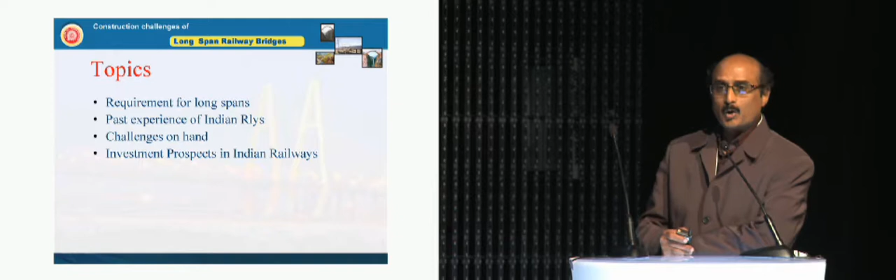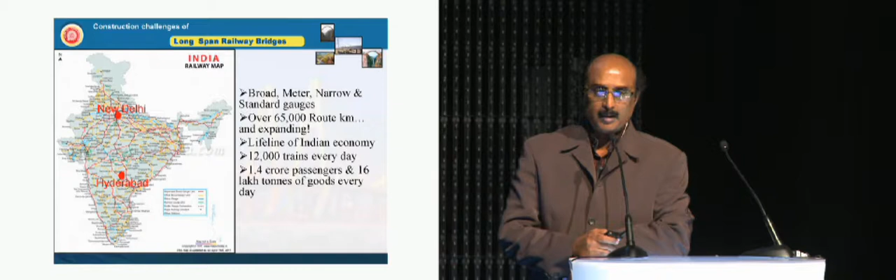When we talk about bridges, it is the long span bridges which are very critical. To give an introduction about Indian Railways, there are different gauges in India - broad gauge being the largest, we have meter gauge, narrow gauge, and even standard gauge on the metros. The statistics are very staggering - we have over 65,000 route kilometers, which comes to more than 1 lakh, almost 100,000 track kilometers, and it's expanding. Every year a lot of new projects are coming up, new railway tracks are being added. New Delhi is the capital of India, and Hyderabad, which I've highlighted, is the place from where I have come.

When we speak of long span bridges, we should also know why they are required, because they are generally considered to be very costly, so we should not just go for a long span bridge. These are the requirements for which a long span bridge is needed: navigational, when you have to pass huge vessels, huge ships across the ocean, and a bridge is to be constructed across the navigational channel. Sometimes you have to connect two valleys, then you need a long span. In case of metros, when it has to cross a major road junction, you need a flyover of a very long span.

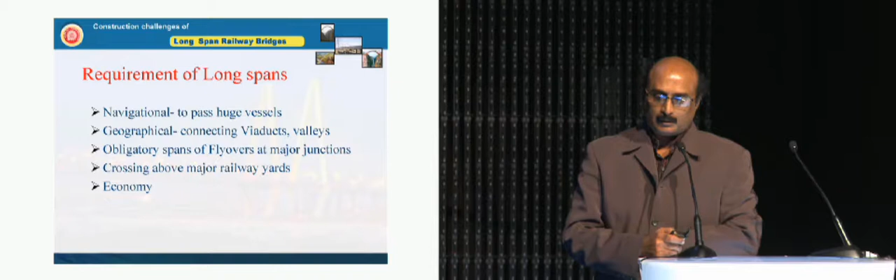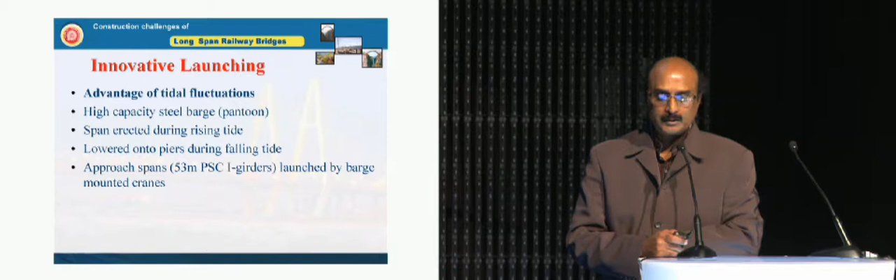Some of the important bridges we have constructed include the Zuari Bridge in Goa, which is a very interesting bridge. The location is Goa, towards the western coast of India. The specialty here is the launching of the main girder - the main steel span is almost as high as 600 tons. So launching of the main span was a real challenge, and a very innovative method making use of the tidal fluctuations, the low tide to high tide fluctuation, has been used to erect the span. This is the bridge after construction.

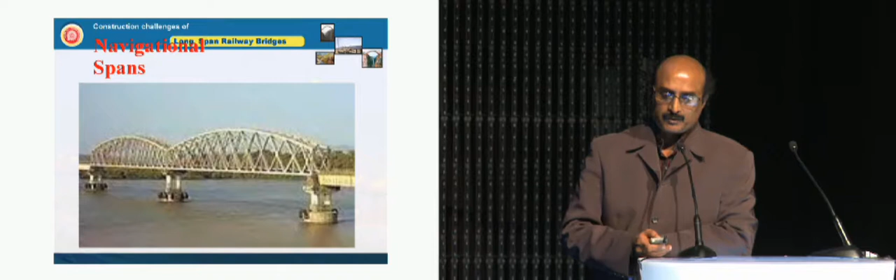What has been done is, on the river bank, a specially made platform is prepared with temporary supports. On those temporary supports, the entire bridge girder, almost 125 meters long, has been erected. Simultaneously, a high capacity pontoon, a floating device, has been placed on the river, and the bridge truss has been slided into position on the river. Once it is on the pontoon, the bridge girder has been raised to ensure it clears the piers, and as I said, the tidal fluctuation variation has been taken advantage of.

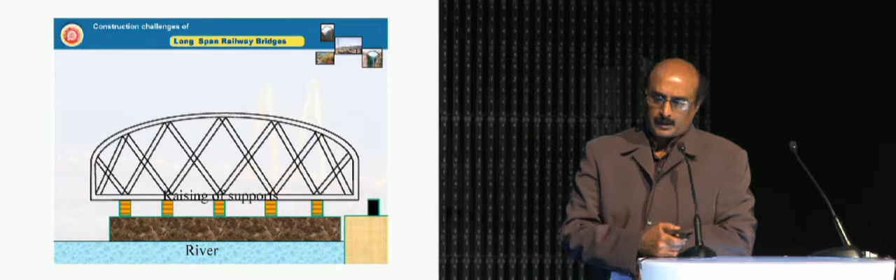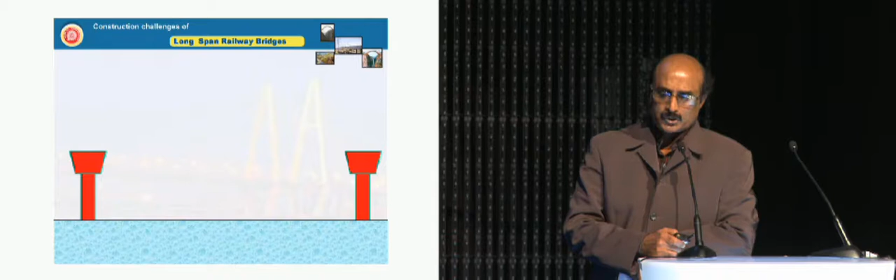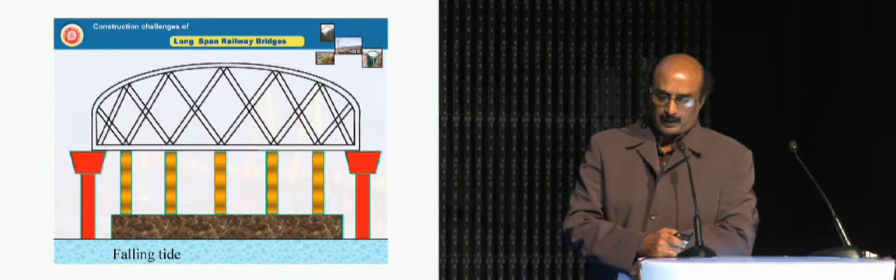So the tide is rising, and when the tide has fully raised, it is now towed into position - the red color structures behind are the supports. The bridge is brought into position, and the entire operation is during high tide. Once it has come into position, it will wait for the falling tide, and the bridge is automatically launched. Further falling will reduce the supports. So the bridge is launched with very little effort, making full use of the natural tidal force.

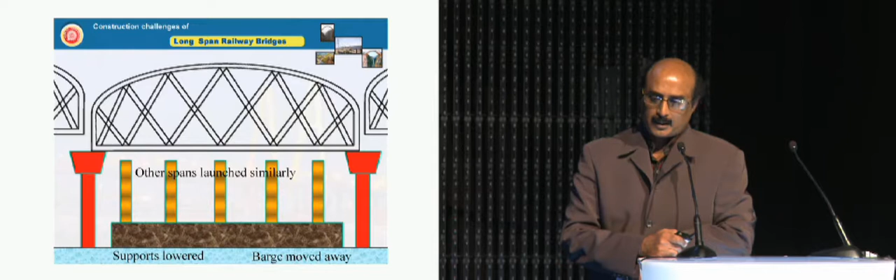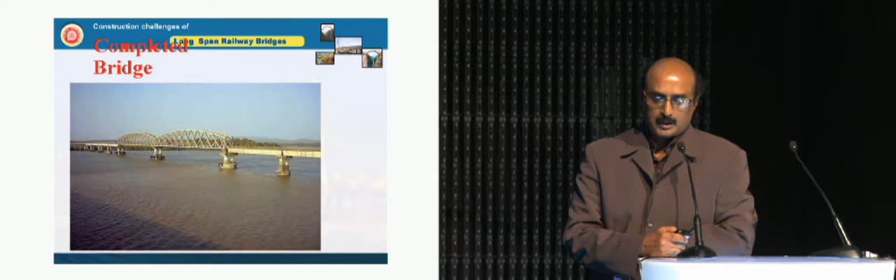Similarly, the approach spans are also launched - this is the other side, which has smaller bridges, smaller spans. They are launched by means of cranes, which are mounted again on barges. This is the completed bridge.

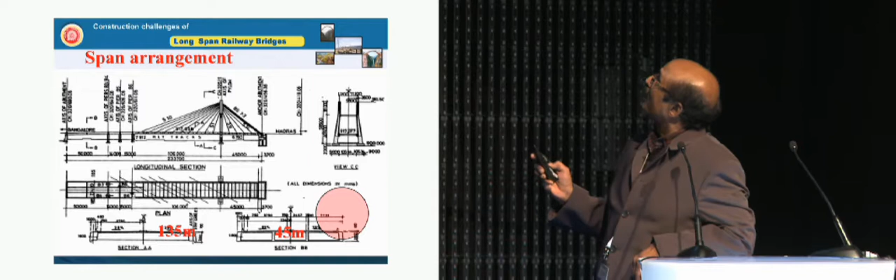So there is a huge imbalance in the two spans, as a result of which this abutment will have high uplift forces - that support will have high uplift forces. So it has to be properly designed to ensure that it will not get lifted up.

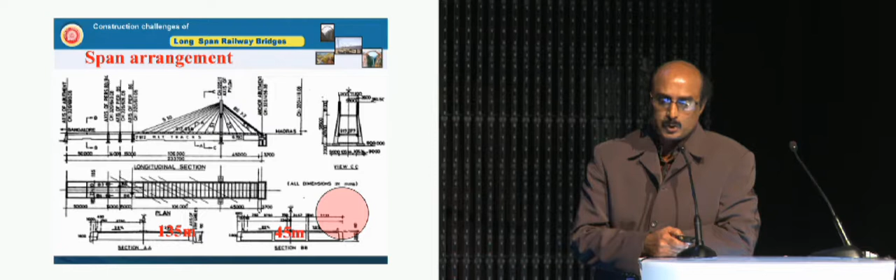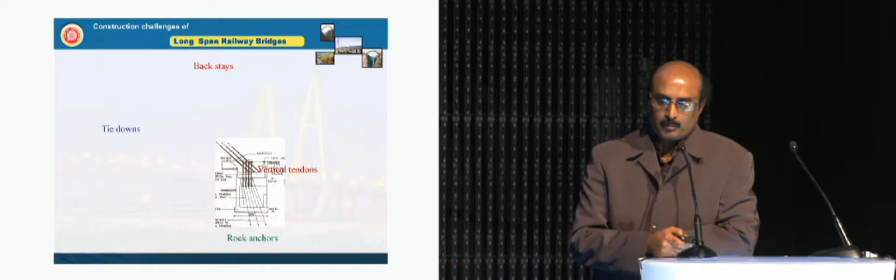The innovative design adopted here provides pre-stressed cables at different levels: backstays which connect the superstructure to the substructure, tie downs, vertical tendons, and rock anchors. This entire system ensures that the whole bridge is integrated into the rock below and has adequate stability.

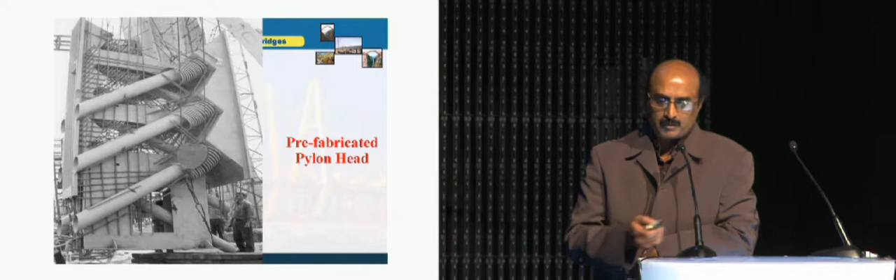During the same time, self-climbing jump formwork was developed to ensure the work progressed smoothly, and the pylon head which connects all the pre-stressed cables was prefabricated, imported from Japan, and launched into position.

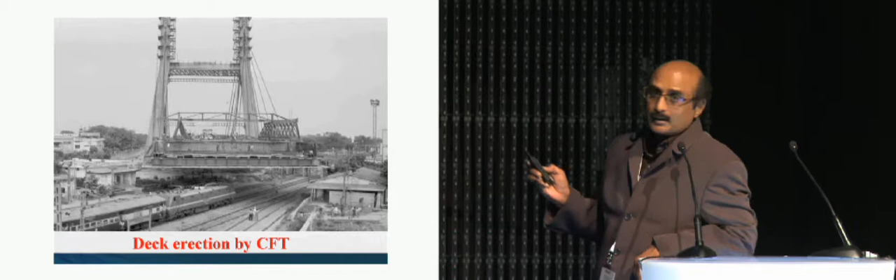During execution of the deck, since it had to be built across railway tracks, a lot of safety had to be taken, not only for construction personnel but also for the trains and traffic below. Three-level safety was taken care of: a steel platform, a safety netting below it, and since it's an electrified section, a polythene insulated sheet was also provided. The work was successfully completed.

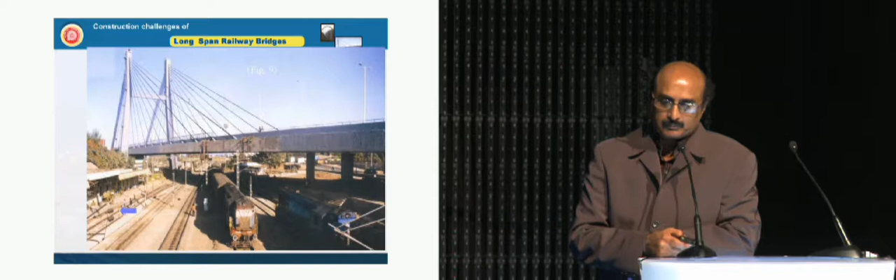Another interesting bridge is near Rajahmundry, on the eastern coast of India in Andhra Pradesh. It has 28 spans of 300 feet, which is 91 meters, and the bridge had to be constructed under perennial flow of water—the river always has water, even during summer. So a unique type of construction had to be developed because no supports could be taken from the bottom.

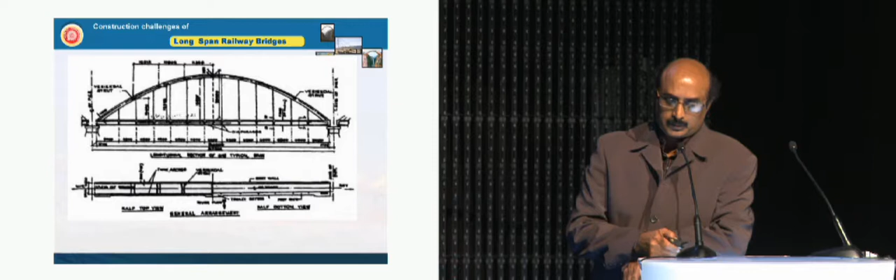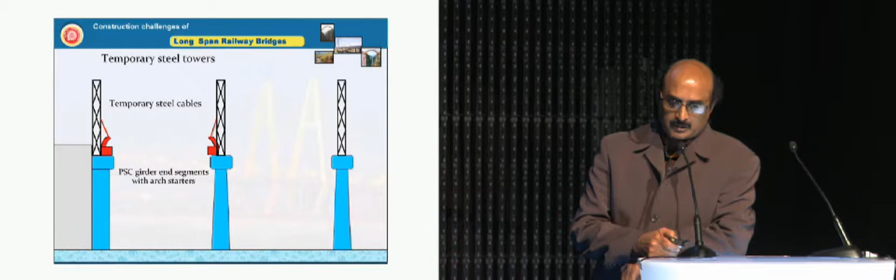Once the substructure—abutments and piers—was completed, temporary steel towers were erected on each support, and from these towers, temporary steel cables were erected. With the help of these cables and towers, the first starting segments were cast, further cables were erected, and cantilever construction of the arch was taken up in stages.

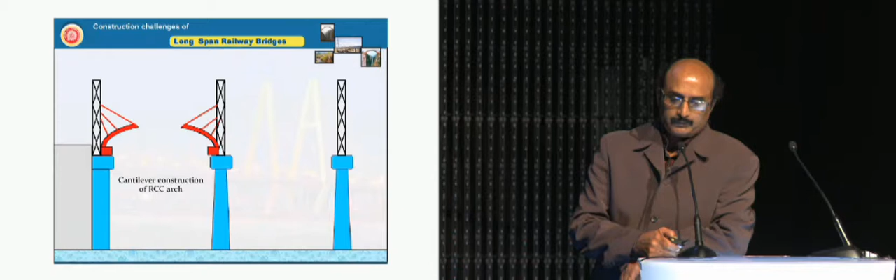First, the arch is completed in all respects. Once the arch is ready, the next step is insertion of hangers.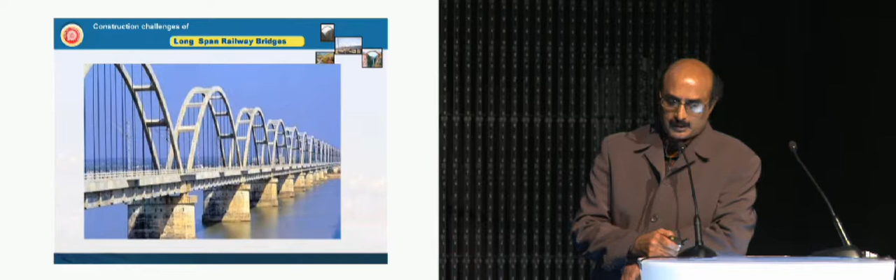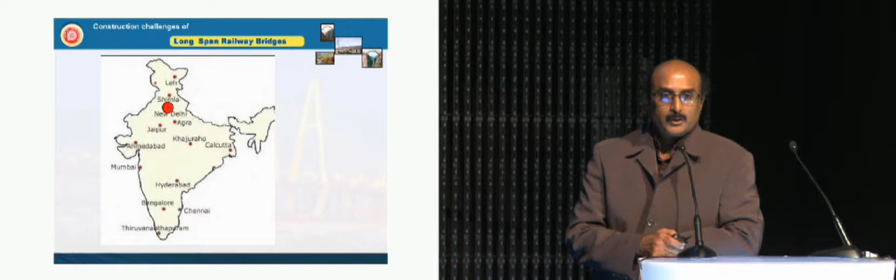A lot of local innovation was made during construction. This next example is for the Delhi Metro, a bridge across railway tracks near New Delhi, the capital of India. This is how the bridge looks—the main span crosses the Indian railway tracks, almost 4 to 5 electrified tracks in a very busy section where trains are always running, and the bridge had to be constructed without disrupting train services.

This is an extradosed bridge. What is an extradosed bridge? By definition, it's a hybrid bridge—an innovative bridge between a cable stay bridge and a girder bridge.

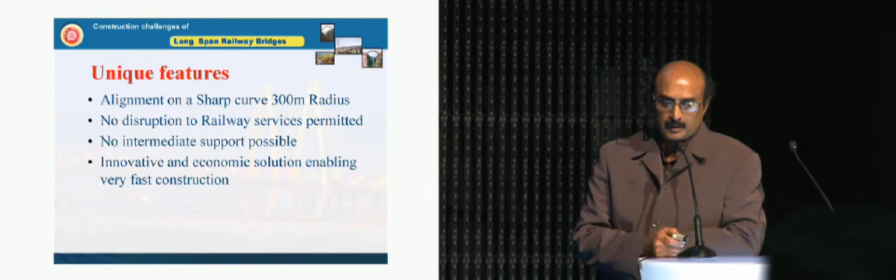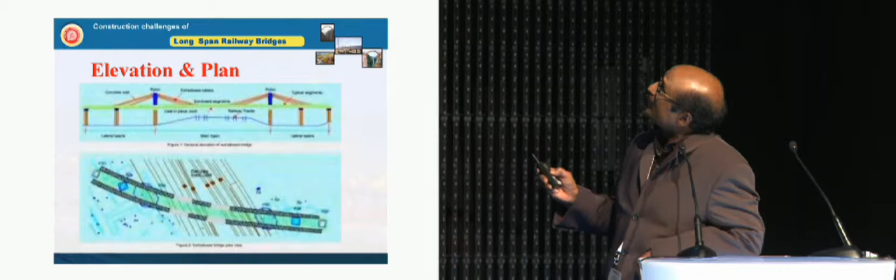It's also on a sharp curve, and there should be no disruption of rail services. No intermediate support is possible within that span of 90 meters—we cannot have any support. This is the elevation showing how it looks, over the Indian railway tracks where the bridge had to be constructed.

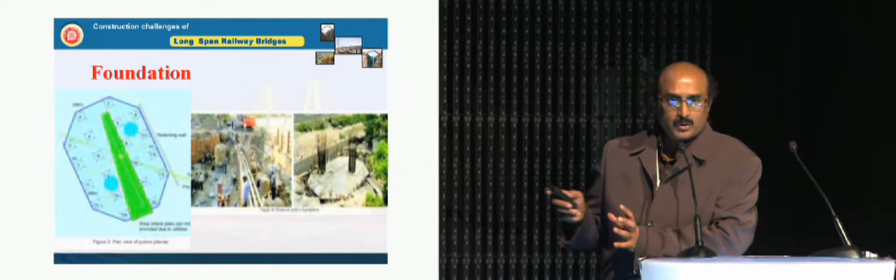For the foundation, pile foundations were proposed. But while executing the pile foundation, we had a problem of hidden utilities—a lot of pipelines were crossing. So instead of dismantling the pipes, an opening was provided through which the utilities continue to be there, and the pile cap was cast in such a way that the bridge progressed without shifting the utilities.

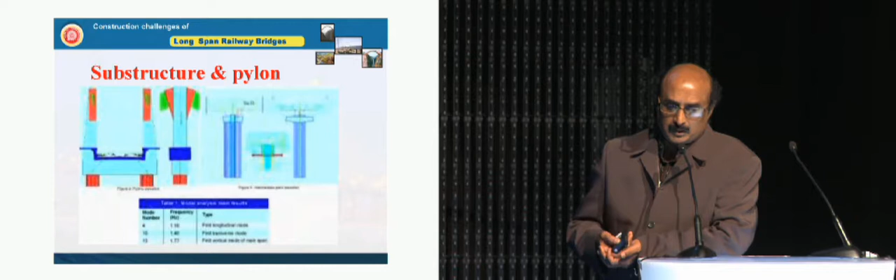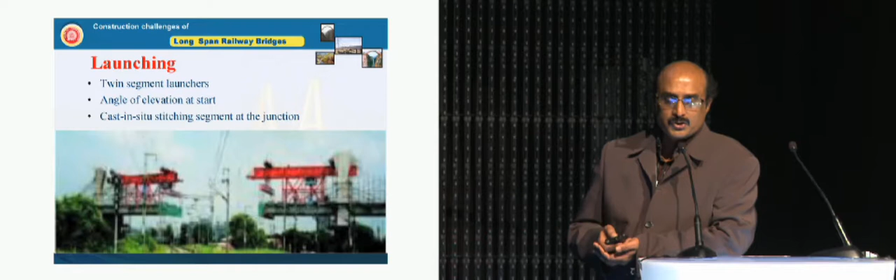The substructure and pylon consisted of RCC columns constructed by slip form work, and the superstructure is a U-shaped pre-stressed concrete segmental deck carrying 2 metro tracks. The launching was done by a twin segment launcher, similar to cantilever construction, but here the launcher feeds segments from either side and progresses from both ends.

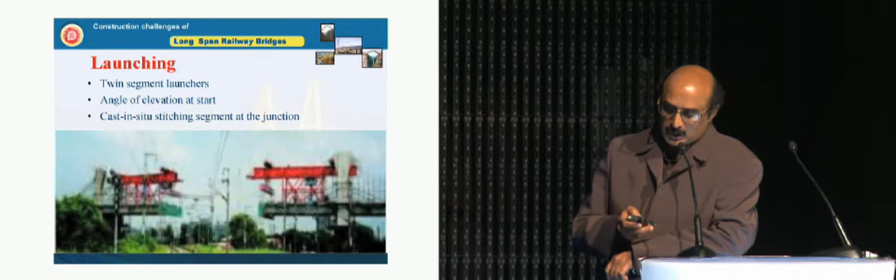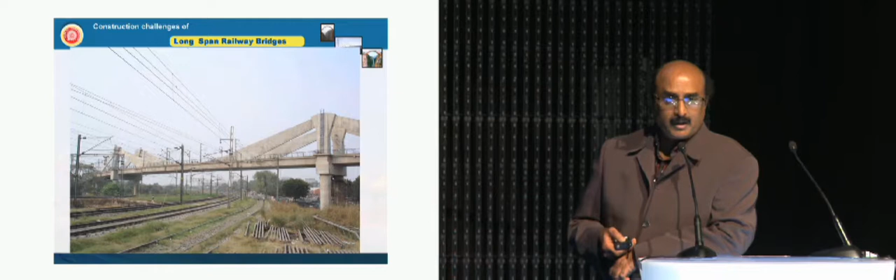A lot of safety precautions were taken to ensure the trains were not affected. This shows the final stages, when both arms meet at the center. A closure pour is made and the bridge is made ready for commissioning. This is the bridge at the time of commissioning.

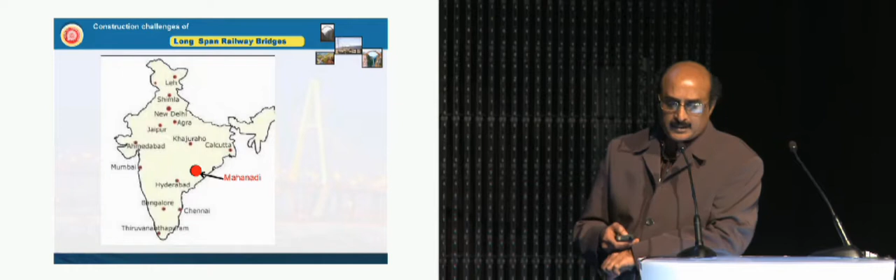Another interesting case is a steel bridge. So far we have seen concrete bridges. This is the Mahanadi Bridge, a steel bridge, again on the eastern coast of India in Orissa state. It also has spans of 300 feet, about 91 meters, with perennial flow of water.

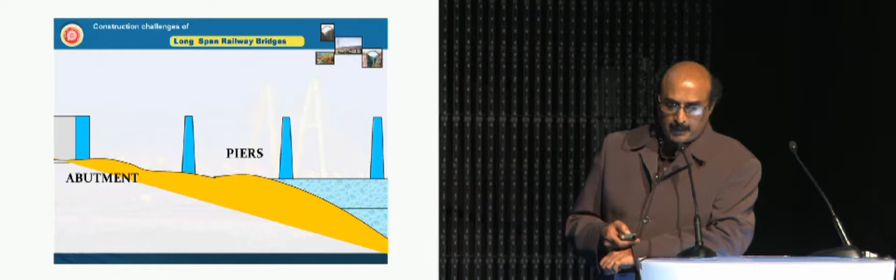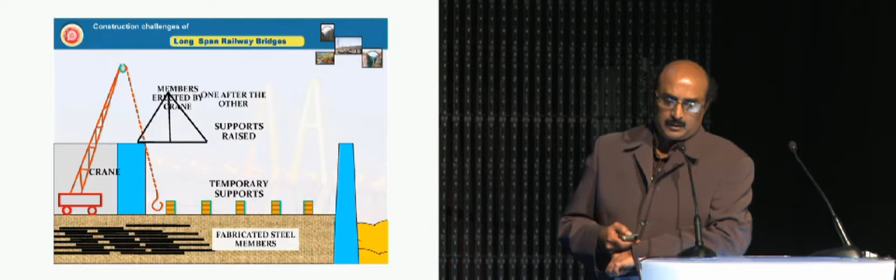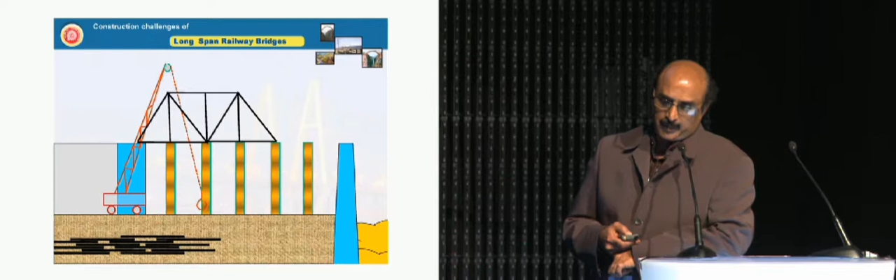Since it's a steel bridge, the system adopted is slightly different. The first span, generally a land span, is erected on compacted ground since access is available there for cranes and material. The supports are raised to the required level and prefabricated members are erected one after another by crane, since road access is available for the first span. The first span is thus erected and completed.

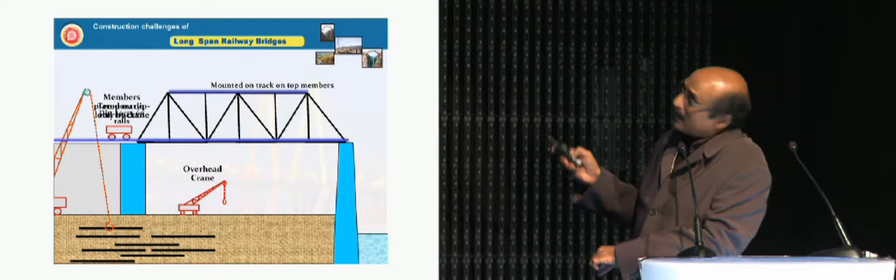Now the real challenge is constructing the subsequent spans, since they are underwater and a road crane cannot be taken over the water. So tracks have been erected on the top and bottom—you can see a track here and a track there—and a small crane is erected on top that can lift the members, along with a dip lorry which carries the member from one end to the other.

This is the dotted line showing the location of the second span. A temporary connection is made between the first and second span so that the counterbalance is available, and the track is extended and the members are fed from the end on the trolley.

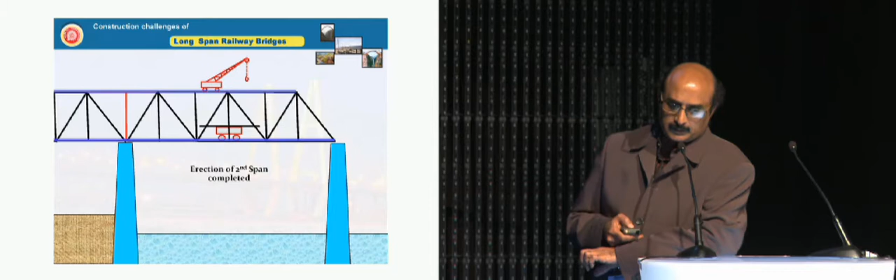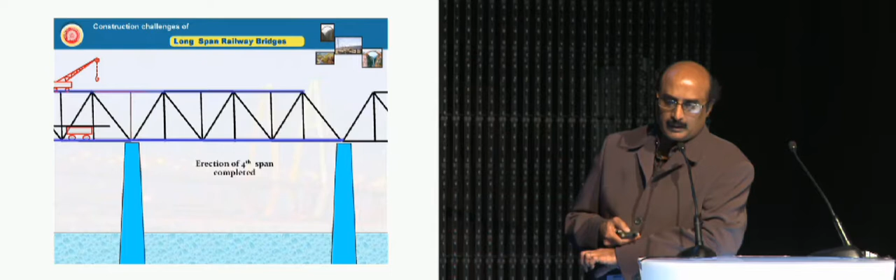The overhead crane launches the members one after the other, and the second span is completed. Now the process simply repeats itself. The temporary girder is no longer required between the first two spans, so it is shifted to between the second and third spans. In the same manner, the third span is completed, the fourth is also completed, and all the spans can be completed this way.

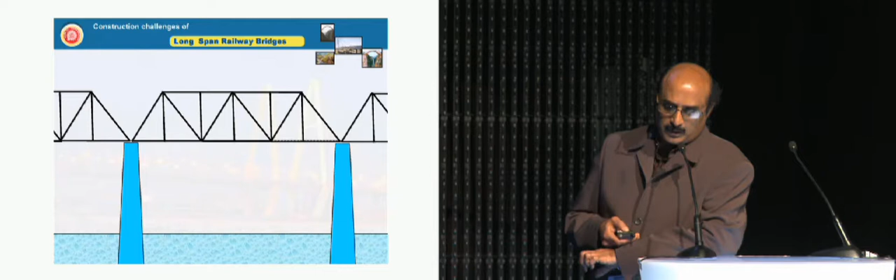This is the completed bridge. Now what is required is laying of the track on the bridge, and the train can take off.

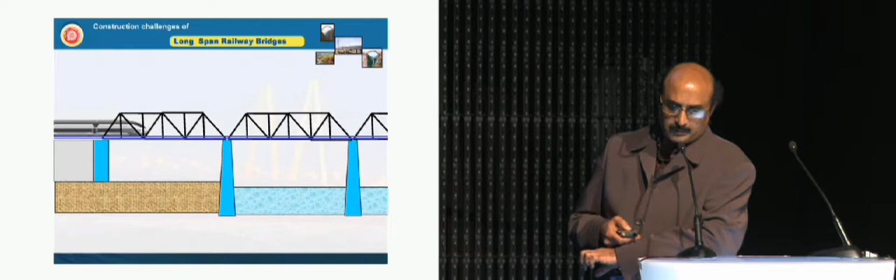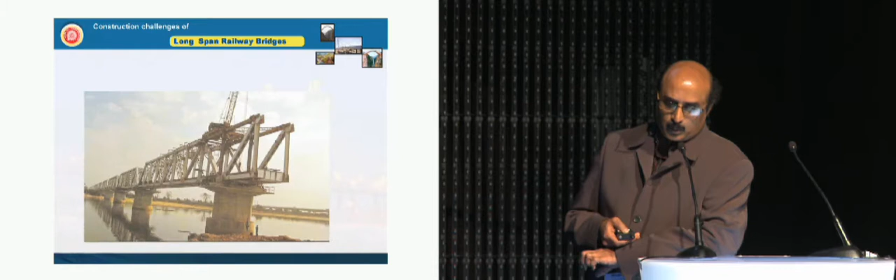These are the pictures during the construction stage. You can see how the members are taken to the site, and this is the overhead crane used for launching the members. Different stages show temporary connections being made, and temporary strengthening of the members is also required. This is a completed bridge.

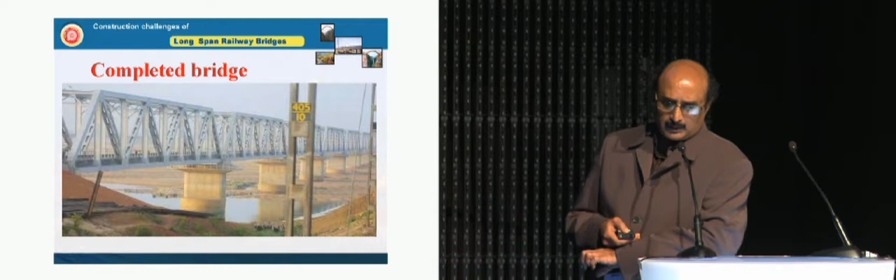This is one interesting bridge which is going to take place in the coming few years, called the Chenab Bridge. It has a very long span of 485 meters, with a unique distinction of being the longest span of that configuration. You can see it's at a height of 359 meters.

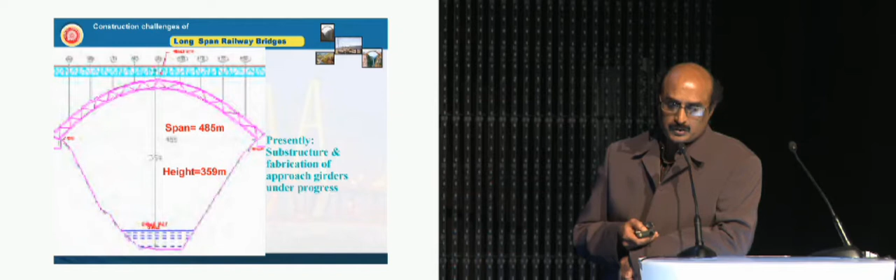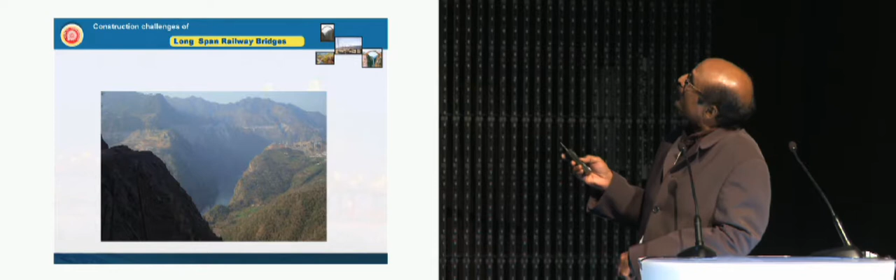The approach construction is already under progress. This is the location of the bridge. This is the approach, this is where the bridge is going to come up. The schematic view shows it is still not completed.

It has got a lot of unique features. It is coming up in a place called Jammu and Kashmir, in the northernmost part of India. The specific nature of that site is that it is highly seismic prone, in the highest earthquake sensitive zone. At the same time, the wind speeds are also very high, on the order of 250 kilometers per hour, and it is on a very sloping bed.

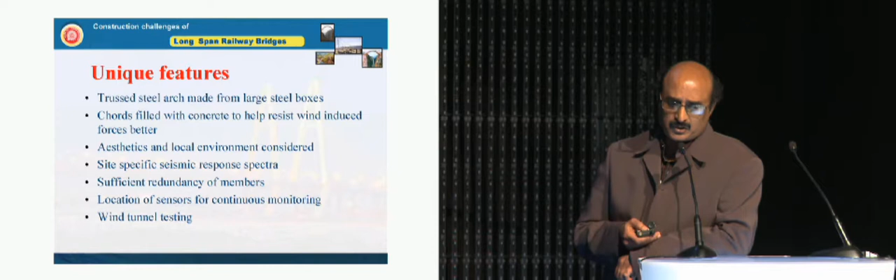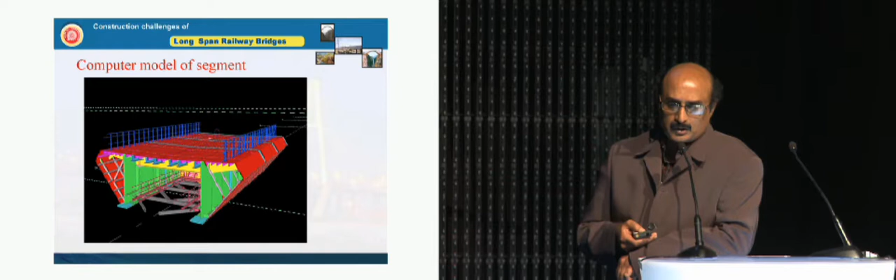So a lot of design challenges have been faced, and finally the bridge design is completed and it is coming up. Even the wind tunnel testing has been done in order to ensure that it is safe, and a model has been generated in the computer. It's a very complex type of model.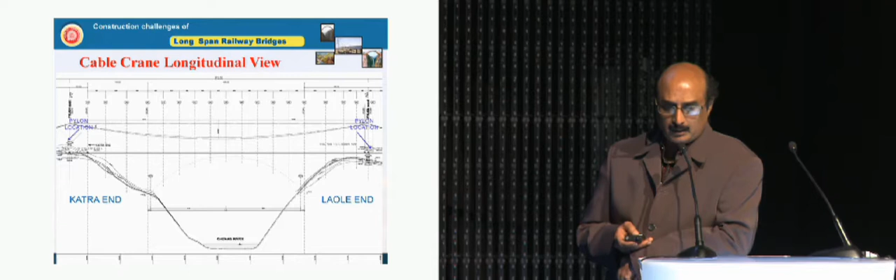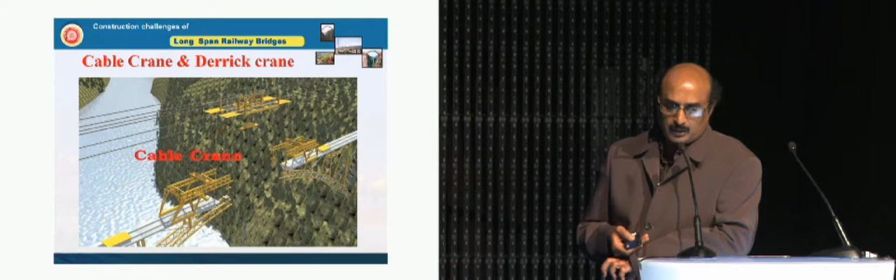Even for the erection of the arch, a very interesting scheme of a launching arrangement has been devised. You can see it's a cable crane as well as derrick cranes, both used for launching it. We can see in sequential steps how the arch is erected by means of the cable cranes and the derricks.

This bridge is yet to be done, and this is the final schematic view of the bridge. That's about the bridge projects.

Now let me come to the topic of the day, which I'm supposed to speak on: the challenges and investment opportunities in India. Indian Railways, from which I come, has developed a vision called Vision 2020. Under that vision, we have huge targets of construction of new lines, doubling or quadrupling existing lines, construction of bullet trains or high-speed trains, all at an investment of 280 billion USD, and it's already taken off.

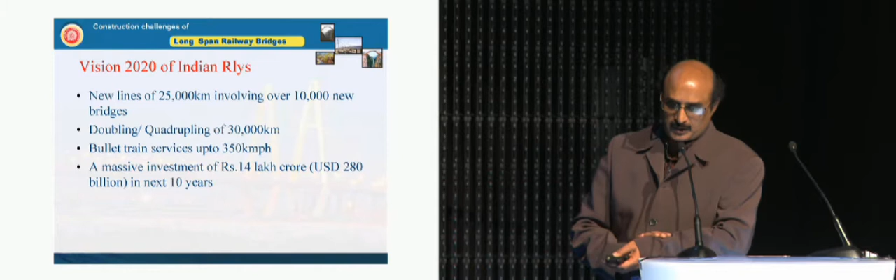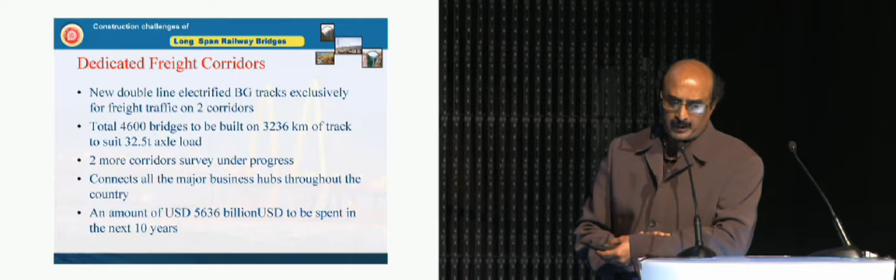Similarly, something called dedicated freight corridors are being constructed, where new double-line electrified broad gauge tracks exclusively for carrying freight traffic are being built. That is a magnitude of work totaling 4,600 bridges and 3,236 kilometers of track. The axle load also is considerably high, 32.5 tons, and the order of investment is massive.

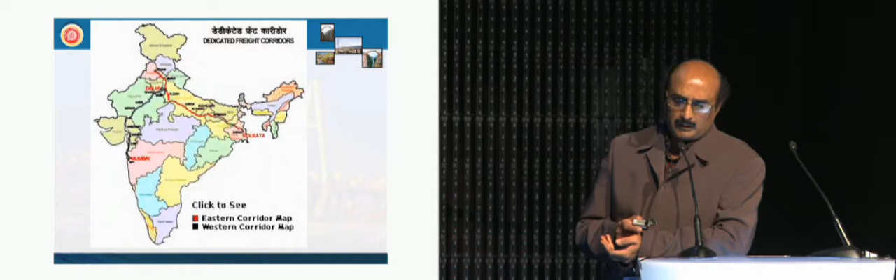These are the dedicated freight corridors which I have been mentioning. We have one on the eastern side and one on the western side. Similarly, there are two more corridors coming in the south in subsequent years.

Metro rails. Metro rail is coming up in a very big way in India. Already in 8 major cities, metro work is progressing, and 8 more cities have already shown interest, with a lot of planning made, almost about to take off. A separate authority is also being developed so that these projects are taken on the fast line, with a total estimated investment of 50,000 billion US dollars - a staggering amount to be spent in the next 12 to 15 years.

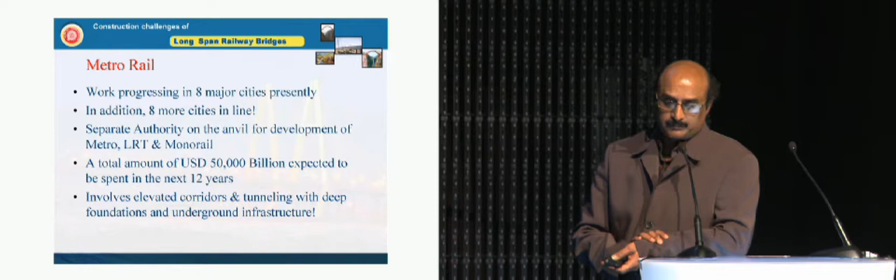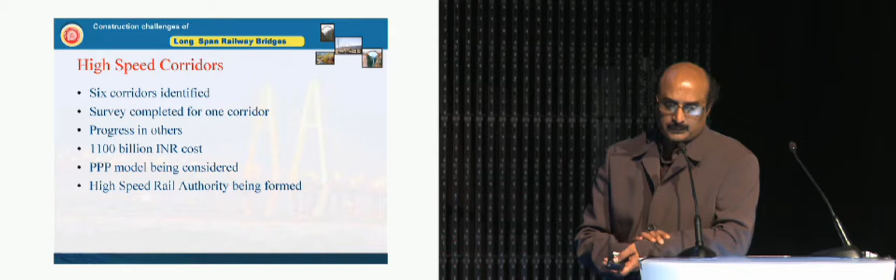Something called high-speed corridors is also going to come up in India. 6 corridors have been identified, and surveys are in progress in all of them. The amount of investment is 1,100 billion in Indian rupees, and a PPP model is being considered. A separate authority is being formed. These sectors for high speed are distributed in the north, west, and southern parts of the country.

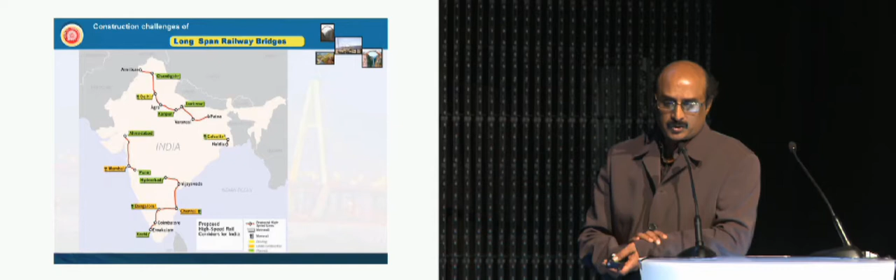Coming to the funding options, after a lot of planning, thinking, and brainstorming, the government has decided it should be a two-form type of funding option: one is called internal, then external.

Internal is totally from the government, and it is for such activities where private investment cannot be easily integrated into the system. For example, capacity augmentation: we have an existing track, we want to provide additional tracks, we have to improve the capacity. It is difficult to segregate the amount of investment and the amount of returns, so in such cases it's better to have our own government funding.

Of course, the funding is from different sources. It has its own sources like surplus in high traffic earnings, and borrowings from the central government, because railways has its own budget in India and the central government has its own budget. So there are two different entities as far as budgeting and financing is concerned. Sometimes railways will go to the central government and borrow the funds at some rates.

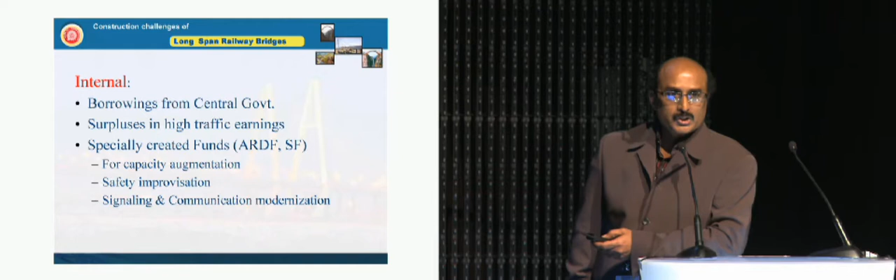And specially created funds — we put some surcharge on some superfast trains, surcharge on some special trains, and whatever surcharge is collected is put into a fund which is used for activities like capacity augmentation and safety improvisation. This is attracting a lot of attention these days because of the importance of safety. Similarly, signaling and communication modernization — these are the activities for which these funds are utilized.

And external funds — we take these mostly as loans from the World Bank, from JICA. These loans are generally taken for a specific project, like the dedicated freight corridor I was mentioning. So we have a specific chunk, and the World Bank or whoever is the lending authority will know exactly what the project is for, what the investment is for, and what would be the returns and viability of the project.

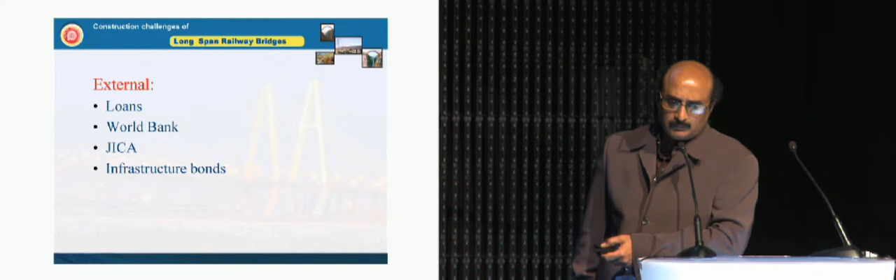Certain PPP models have also been considered, where partial funding is given by the government — we call it VGF, viability gap funding. In such PPP models, to make the proposal financially viable, a part of the railway land is also given for commercial exploitation for a specified period of time and area. It's very clearly specified what area will be given to the developer or entrepreneur for exploitation.

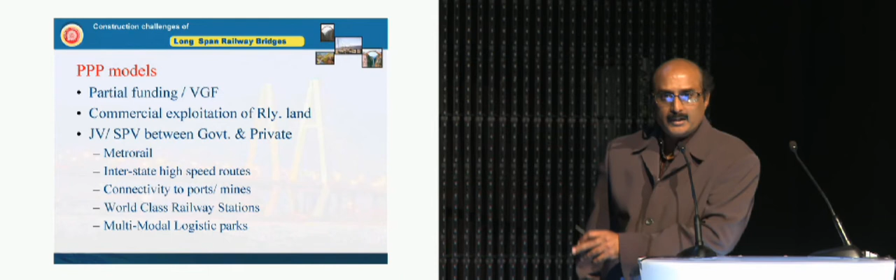Then connectivity to ports and mines. We have the main lines, but the ports and the iron ore mines, the coal mines, are left without any connection. So the connecting track between the main line and the existing railway network on the port or the ore or whatever the industry — that connectivity is again formed as a JV, because there it's a tangible sort of returns. We know exactly what the traffic is and how to share the revenue.

Multimodal logistic parks — this is also coming up in a big way. The ICDs, we call them inland container depots, and logistic parks. Even this has been totally given to the private sector. A private organization can develop a logistic park, including the last mile connectivity, the rail connectivity from the nearest railway station, and the sharing pattern is also very clearly mentioned. So a lot of liberalization is taking place, at least in those areas where it's not directly involving the safety and integrity of the railways, and where we can very clearly demarcate the roles, responsibilities, and revenues.

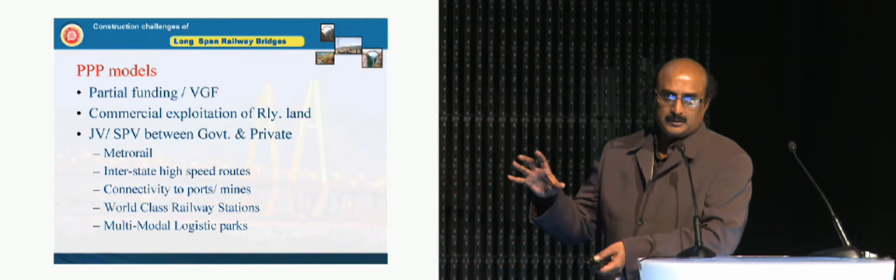BOT mode, of course, is a time-tested mode in India. The National Highway Authority has successfully implemented it for all the national highways. In Indian Railways, we want to implement it for high-speed corridors, developing world-class stations — a few stations have been identified for this. Then setting up of rolling stock manufacturing units, because when we increase the tracks, we need rolling stock also to run the trains.

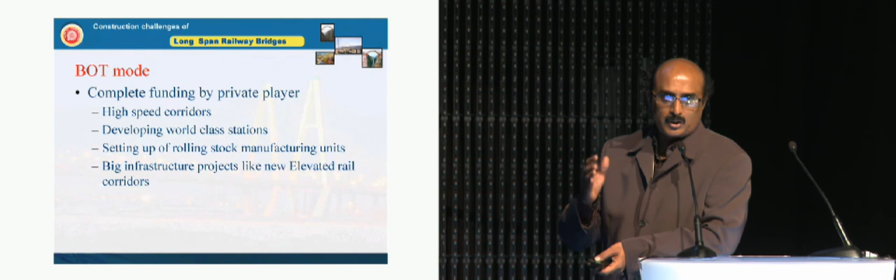So separate manufacturing units are going to be set up, and elevated rail corridors — which is not the metro, it's only a rail corridor connecting two major stations within a city. It is not a metro, it is not a railway, it's an elevated rail corridor. These are also going to come up, especially in Mumbai.

So that's it. India is opening its portals. A lot of growth is going to come up. A lot of funds are getting infused into Indian infrastructure, especially Indian railways. And there's room for everybody. Thank you.